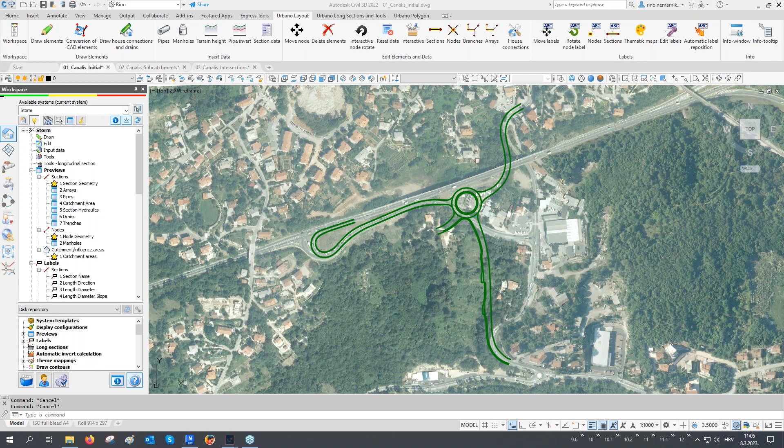As you can see here in this drawing, I have just this raster image of this area and these road edges that I received from a road designer. Here you can also see the existing standard T intersection that will be replaced with this new roundabout on a slightly different location. What else do I have in this drawing? I will show you.

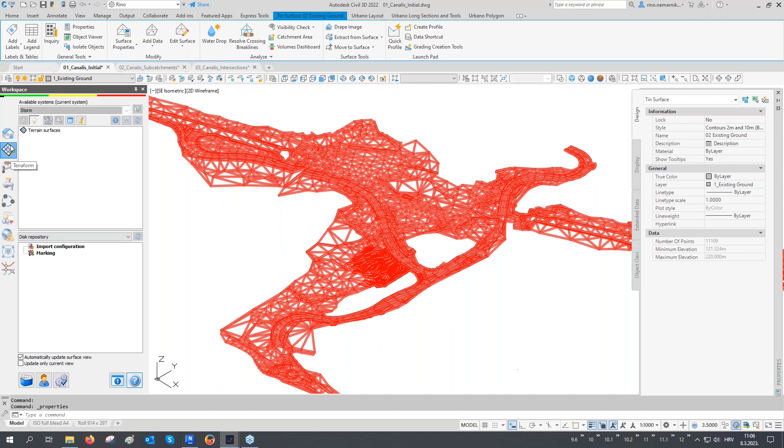I have 2 DTM surfaces. This is the existing ground surface. If we take a look at it in 3D, we can see this is a Civil 3D DTM surface. It's important to say that if you run Urbano on top of Civil 3D, you can use Civil 3D DTM surfaces directly. But if you run Urbano on plain AutoCAD, you can also use our own DTM modeler, which is called Terraform. So this is the existing ground.

And also I will show you the finished ground, which is this road surface that I received from the road designer. This will be our reference surface to design our storm network.

Okay, let's go back to plan view. And again, let's switch to a different layer state where I have some helping layers, some helping points, that I will connect by drawing the network interactively. Also I have some AutoCAD polylines that I will use to convert to an Urbano storm network.

So the first way how you can draw the network in Urbano is by drawing interactively in plan. Here in this dialog, you can see that you can set up many different options and parameters. For example, you can automatically set terrain elevations from a selected DTM surface, automatically set invert elevations to be on a constant depth below terrain, and also set pipe group and pipe diameter from the pipe catalog.

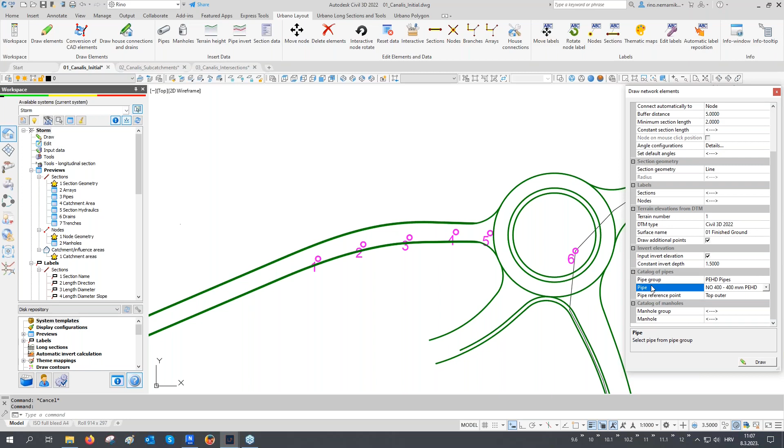So let's click draw. Now I will turn on AutoCAD OSNAP to just snap to the centers of these circles. Notice how, as I am clicking, the elevations are being automatically read from the selected DTM surface.

Okay, so we draw one part of the network interactively, and let's now convert these AutoCAD polylines. Let's open the second function, conversion of CAD elements, where you can set up all the same options as in the previous dialog, and also use this really nice function for layer filtering. Just select some element in plan, the software recognizes which layer this is, and now we can freely select the entire drawing, and the software will select just those elements on the selected layer. So now when we click convert, everything will be converted from plain AutoCAD polylines to Urbano Storm network.

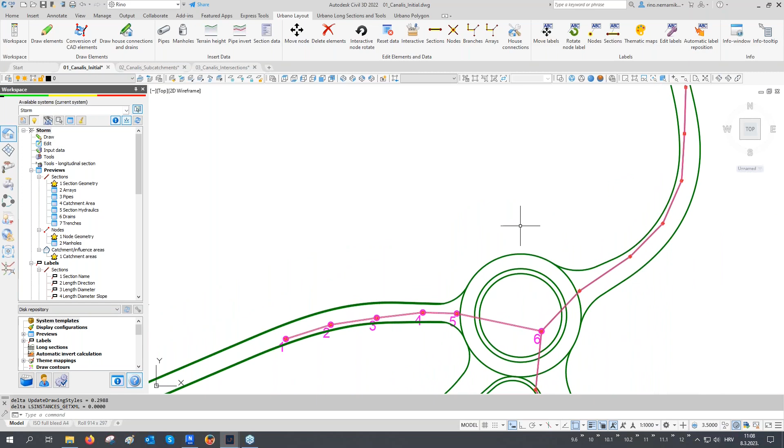Okay, so now that we've drawn our network, let's also label it. I will use default labels for nodes and also for sections. Notice, because these fonts are quite big, we had a lot of overlapping labels. But this can also be resolved really easily by interactively moving some labels one by one, or we can start this really nice function for automatic label reposition, where you can define some parameters for moving. When we click apply, all these labels that are overlapping will be moved, so there is no more overlapping between these labels in the entire drawing.

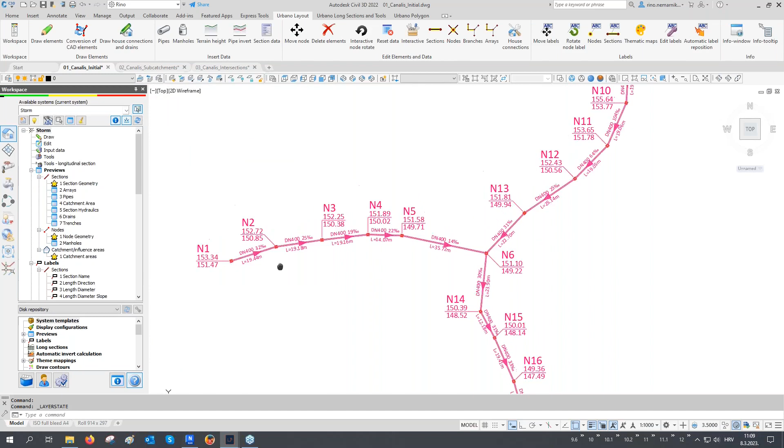Okay, let's now turn off these helping layers and let's focus just on the Urbano network. The best way to analyze an Urbano network is always by using Urbano data tables. Here in the workspace, you can see that each function in Urbano can have multiple configurations, which are basically sets of predefined data, settings, options, and so on for each function. So, for example, let's open these data tables. Here you can see that you can switch between these data configurations, and of course you can edit them and create your own.

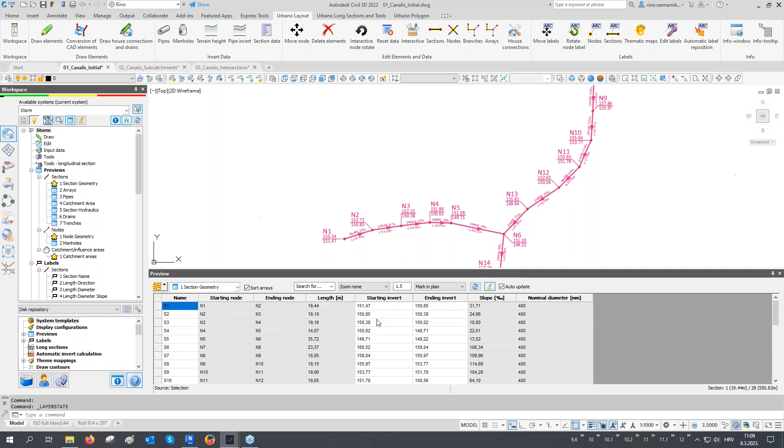If I select some configuration, you can see that you can preview all the data for all the elements for the entire network, or you can use these selection options to select just some parts of the network. For example, if we go to selection of sections, I can select, for example, these 3 sections, and I will get their data in the data table.

But also in Urbano, we have more intelligent selection options, for example selection of branches. Now you will see what a branch is in Urbano. A branch is basically everything in between 2 main nodes, so between starting, ending, and branching nodes. So if I select this branch, I will get all the sections that belong to that branch.

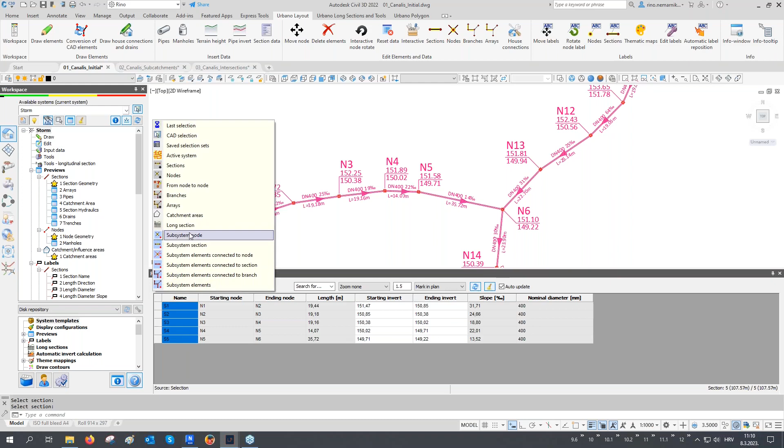Also, we have something that we call arrays. These arrays are basically arbitrary topology groups that the user can create by himself. You can edit them, split them, merge them, and by default one array is one part of the network that you draw at once interactively, or one original polyline if we converted it from CAD elements. So now if I select this array, I will get all the sections that belong to it. But also, we can switch to a different data table configuration for arrays, and now if I select the entire network, I can see the total group data for all the arrays. So we see A1, A2, and this little one is A3.

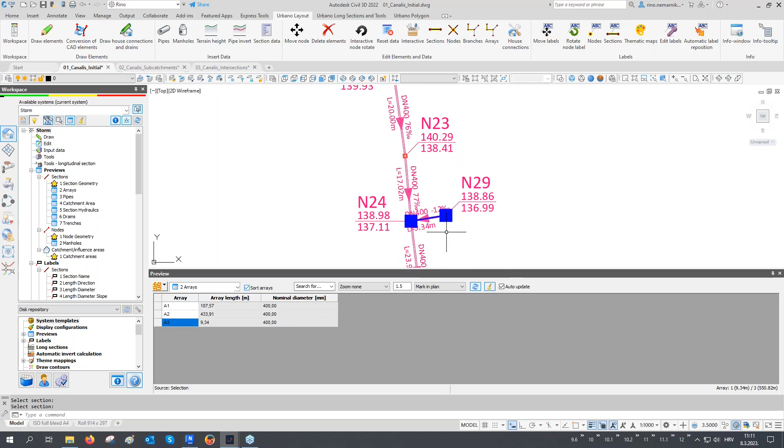Okay, let's rename these arrays now. In Urbano, there are multiple ways how you can rename all the network elements. The easiest way is always by using the data table, so all the white cells in the data table can be edited directly by double clicking in the cell. But I would like to show you one new function from Urbano 11 for automatic renaming of the arrays.

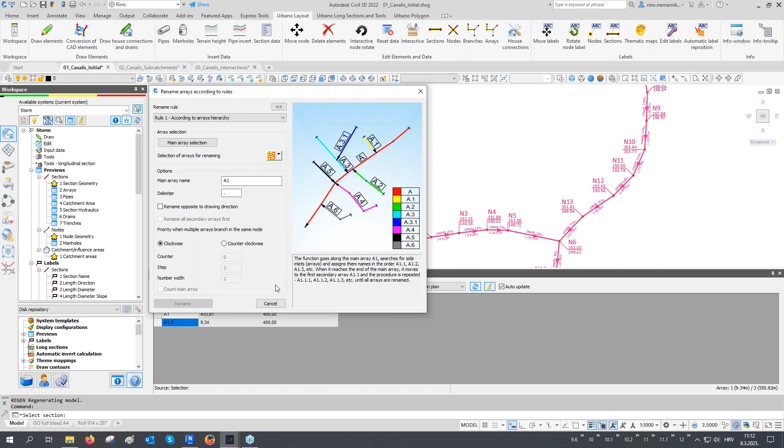So let's go to Edit, Rename Arrays according to rules. Here you can choose between 3 different rules, and I will select the first one, according to arrays hierarchy. So you have to select what will be the main array, then select arrays to be renamed, give a main array name, and set some delimiter. Now when we click rename, all the arrays will be renamed according to that rule. So now if we sort the data table, we see we have the main array A1, we have A1.1, and this little one will be A1.2.

Okay, so now that we renamed the arrays, let's also check the data for the nodes. Let's switch to a node geometry data table where we can see all the data about the nodes. Again, there are multiple ways how you can rename your nodes, but I like to use this automatic option, rename by distance, where you can select the entire network and then give a prefix or suffix.

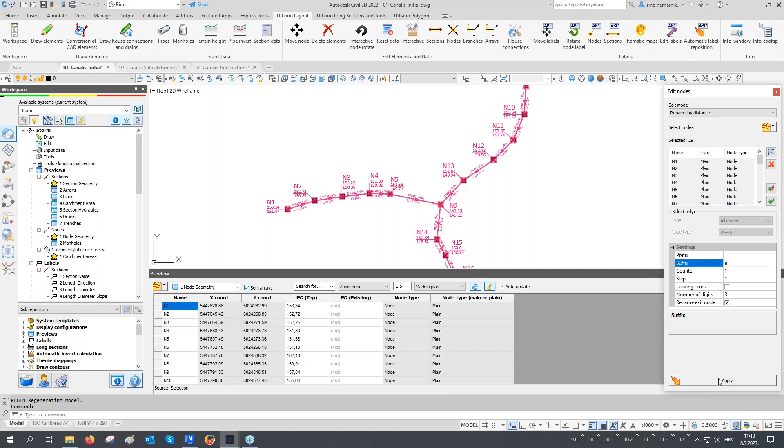In this case, I will set a suffix A. And when we click apply, all the nodes in the entire network will be renamed according to that rule.

So the software is searching for the node that is furthest away from the outfall, and it gives that node the smallest node name. Then it goes up to the branching of the network, and again searches for the node that is furthest away. If we go to the last node of the system, we see that node has the biggest name. Okay, so let's now also rename the sections.

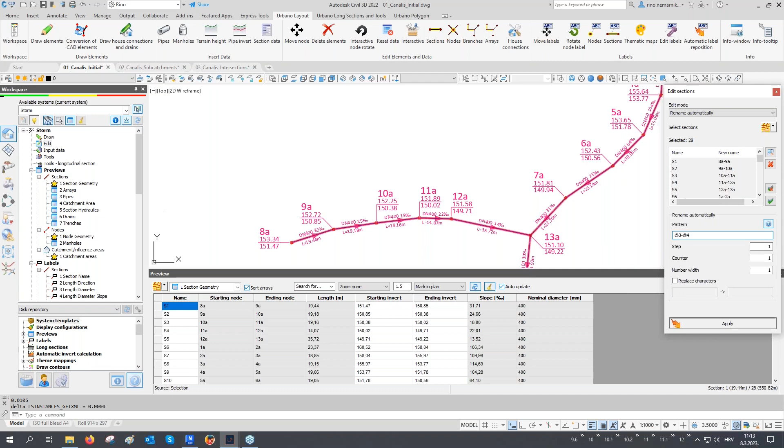Let's switch to section geometry. Like I said, there are multiple ways how you can rename them using multiple different rules. For the sections, I like to use this option to rename them automatically using the pattern from starting node name to ending node name. So now when I click apply, all my sections will be renamed so that the name of the section is from starting to ending node name.

Okay, so now that we know everything there is to know about Urbano topology and selection options, let's also draw profiles. To draw profiles in Urbano is extremely easy. Basically, all you have to do is select a profile configuration, and everything is stored inside, from the scale to the data to language, basically everything.

So I will select the entire network and we will draw these profiles according to arrays, and let's place them all in one row. When we click draw, we just have to define the insertion point and the profiles will be drawn.

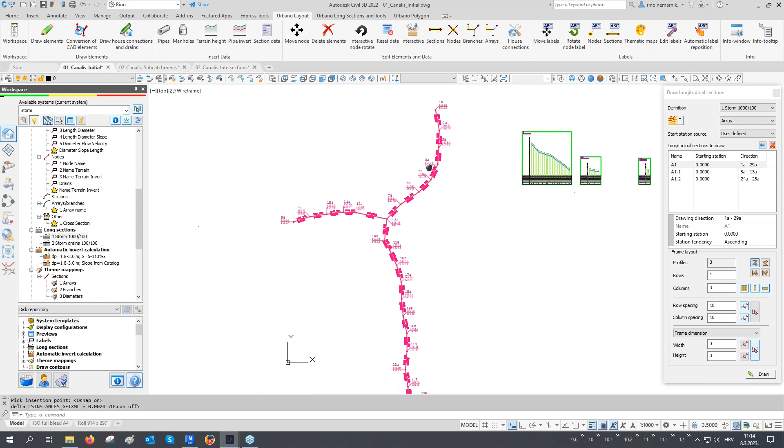Another great way how you can draw your profiles is by using this selection option from node to node, where you can go basically from any node to any node in any direction. For example, let's end up here in the last node of the system, and let's place this profile here. Let's do another one - let's go from this node all up to the last node, and place this profile here.

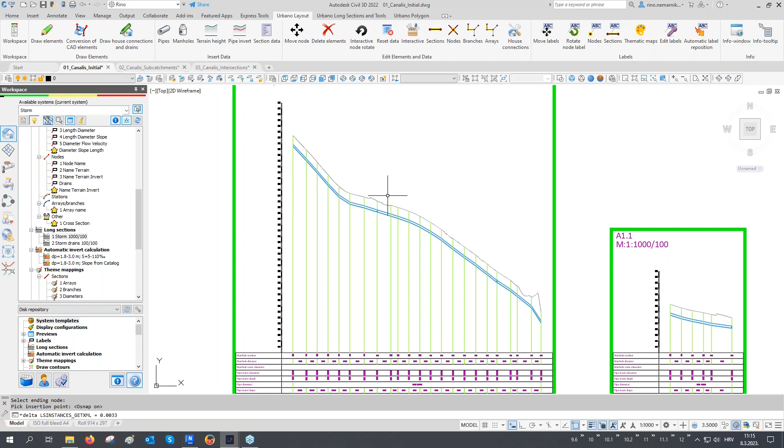Okay, so now that we drew the profiles, let's also check them. We can see that we have just one terrain line - this is the gray line of the finished ground surface that we defined automatically while drawing. But if we want to show more terrain lines in profiles, we can do that as well.

So let's go to the function for setting terrain elevations from digital terrain model. Let's select entire drawing, and from Civil 3D DTM surface, we will set the existing ground into terrain number 2. Here you can see that in Urbano, you can set up to 10 different terrain levels. Okay, let's save. And now you will see an additional terrain line appear in profiles.

So this green line is showing us the existing terrain. Now, if we select this terrain polyline, you see that we have a lot of these vertices, or as we call them in Urbano, additional points. These are basically places in plan where our sections are crossing the triangles of the DTM. Because this DTM is very dense, we have a lot of these unnecessary additional points.

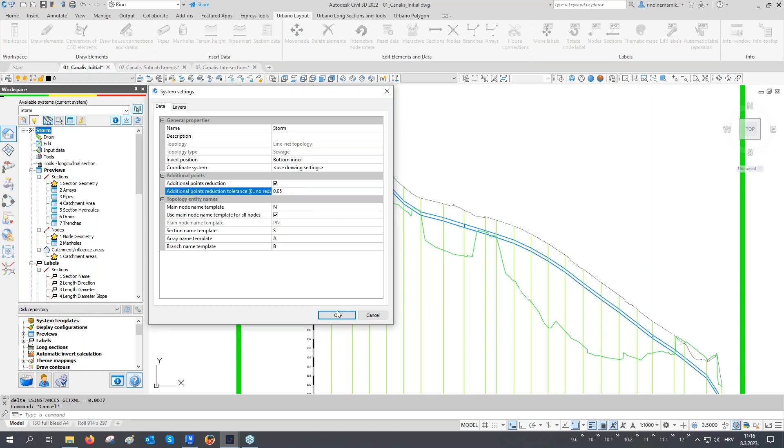Because of that, in version 11, we added a new function. Under the system settings, you can turn on additional point reduction and also define reduction tolerance. For example, let's set this tolerance to 5 centimeters and click OK - notice how the profile will automatically update. Now you can see that we significantly reduced the number of those unnecessary points.

But for example, if we take a look here, we see that maybe we went a little bit too far. So let's go back to this function and decrease this tolerance to 1 centimeter. 1 centimeter is a pretty small tolerance, and you can see that now this is more smooth, but still we significantly reduced the number of these additional points.

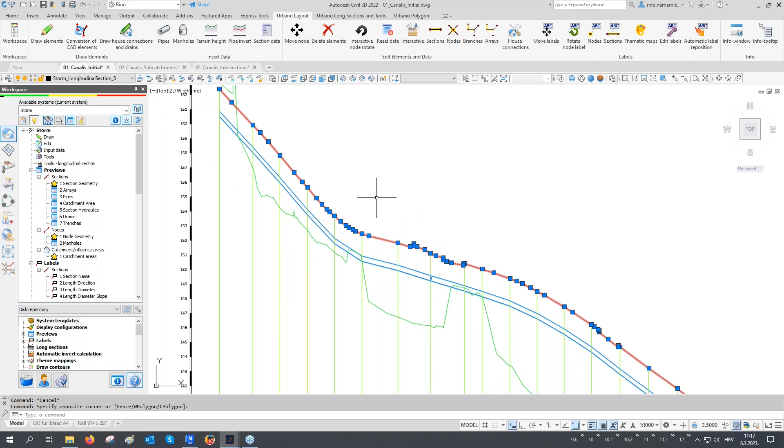Okay, let's now also set the manholes. Let's go to the function for setting of the manholes, and from the manhole catalog you can choose between many different manhole types, shapes, sizes, materials, and so on. I will select this PEHD manhole of 1000 millimeters diameter, select the entire network, and just click save. We will see that the manholes and manhole labels automatically appear in the profiles, and in these labels we can see the manhole name, terrain elevations, and also invert elevations.

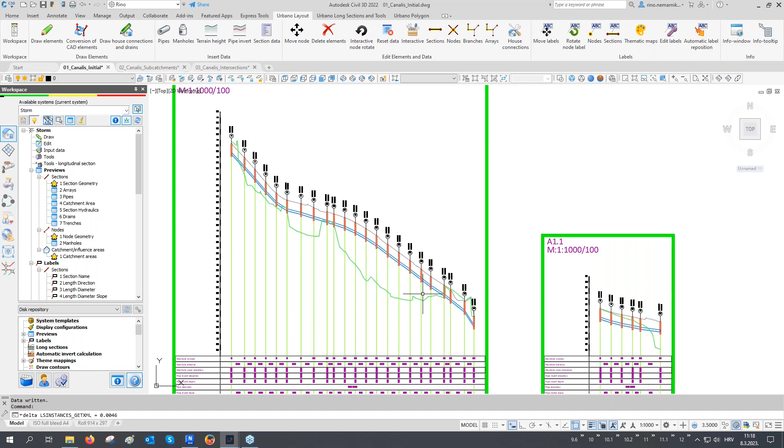Okay, if you remember, while drawing I placed my pipes to be on a constant depth below terrain, which ended up being a pretty nice solution for these first two profiles. But if we take a look at the third profile, we see that we have a negative slope here.

In Urbano, there are many different ways how you can define your pipe invert elevations automatically or interactively. First function I'd like to show you is this automatic invert calculation according to rules, where you can define minimum and maximum depth below terrain, minimum and maximum slope, and also some drop manhole parameters.

So let's select the entire network. Let's calculate, let's apply the changes, and let's save this configuration. Now you can see that we have a new solution of the pipe invert positions.

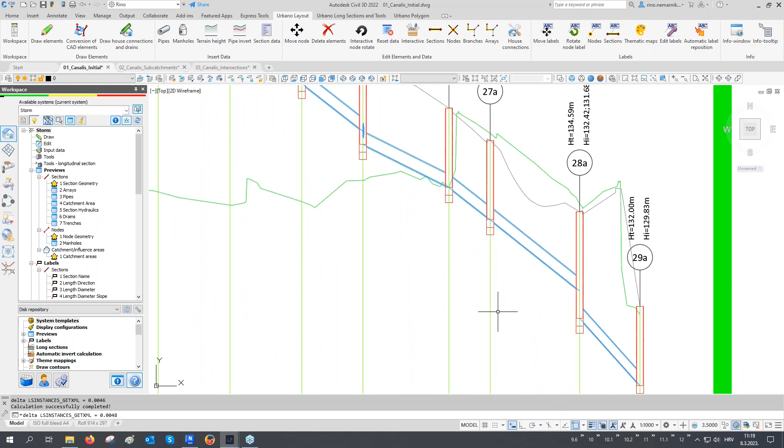So the software did some modifications. We can see that it inserted drop manholes in some places, and also the pipes are a little bit deeper. If you are not 100% satisfied with this solution offered by the software, of course you can continue editing these pipe invert positions by interactively drawing or editing pipe invert directly in the profiles.

I like to use this option, input and edit pipe invert, where you can basically straighten or even draw your pipe invert by line or by slope. And when I say pipe invert, it doesn't have to be just the invert - you can select what is the reference point on the pipe. It can be, for example, top of the pipe, bottom of the pipe, axis, or invert. We will go with the top of the pipe.

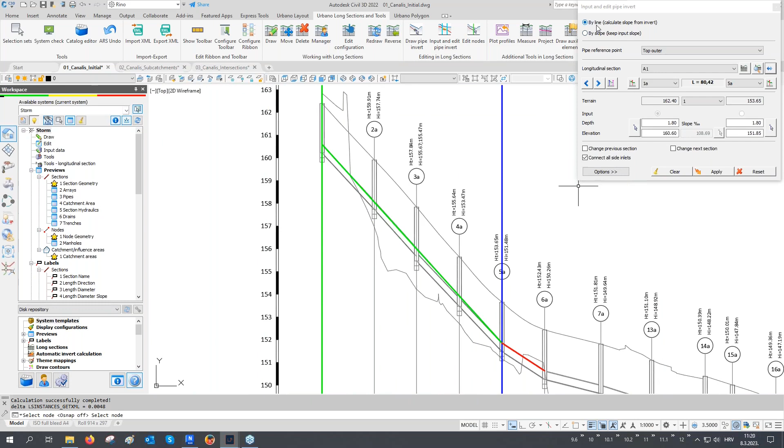So now, let's select some part of the profile, going from node 1 to node 5. First, I will use this option to straighten the pipe by line, and here you can define starting and ending depth or elevation. For example, let's increase the starting depth to 1.85 and end with 1.65. Like this, you can see by this temporary graphic how this solution will look. When you click apply, the pipe invert is changed.

Okay, let's now select the next part of the profile, let's say from node 5 to 18. Now let's switch to a different option, by slope, where you can define starting depth or elevation and a slope. For example, let's increase the starting depth - I'll go with 2.35, so we will have a bigger drop manhole here.

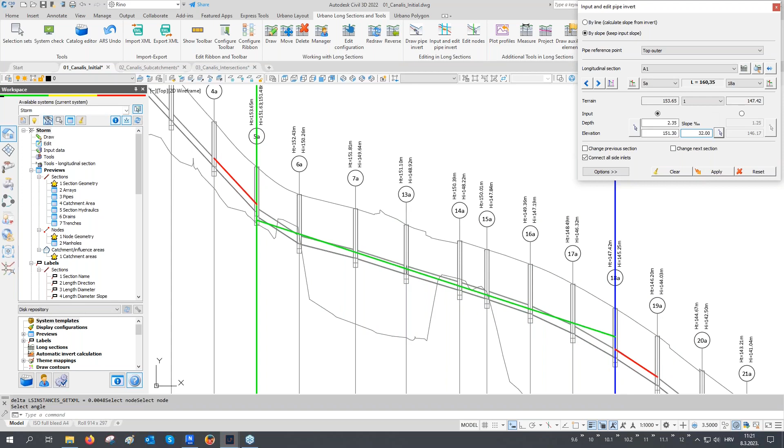Now you can define a constant slope by numerically defining it or by selecting it graphically from the drawing. For example, let's go like this - I will round it to 32. Okay, let's click apply. So this is how you can precisely define your pipe invert elevations for all of your profiles.

Okay, let's now switch to the following topic, which is definition of the catchment areas. I will again switch to a different layer state where I have these AutoCAD closed polylines forming these catchment areas that you can see here. Now we will use these CAD polylines and convert them to Urbano catchment areas.

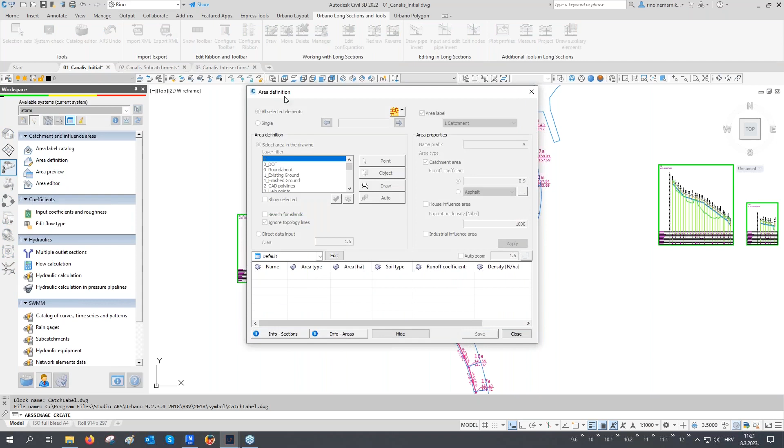So to do that, let's go to the Canalis panel and open the function for catchment area definition. In Urbano, you can define catchment areas so that one catchment area is defined for one section, or that one catchment area is defined for more sections - for example, for a branch, for an array, or for an arbitrary selection from node to node.

In this example, we will set one catchment area per section. So let's select this first section of the network. Now there are many different ways how you can define catchment areas. You can select an object, basically a closed polyline, you can draw the catchment area interactively, or you can select a point inside of a closed polygon.

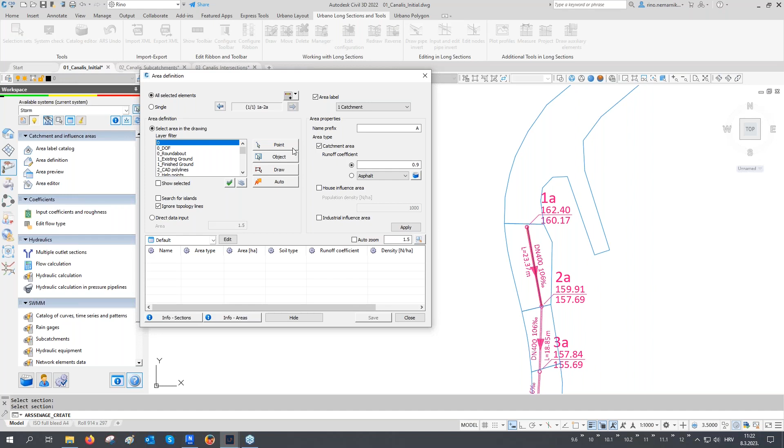First, I will use this option to select a closed polyline. Let's select this polyline here, and you see the software recognizes this as a catchment area. Now we can define a runoff coefficient - numerically, or by selecting it from this catalog of soil types. So let's set it up to be asphalt with a runoff coefficient of 0.9. Let's click OK, apply it, and save it.

So one catchment area is defined. Let's do one more - let's go to the second section of this network, and now I would like to use this pick point option. Here again you can use layer filtering, so just select the element from the plan, and the software recognizes which layer this is.

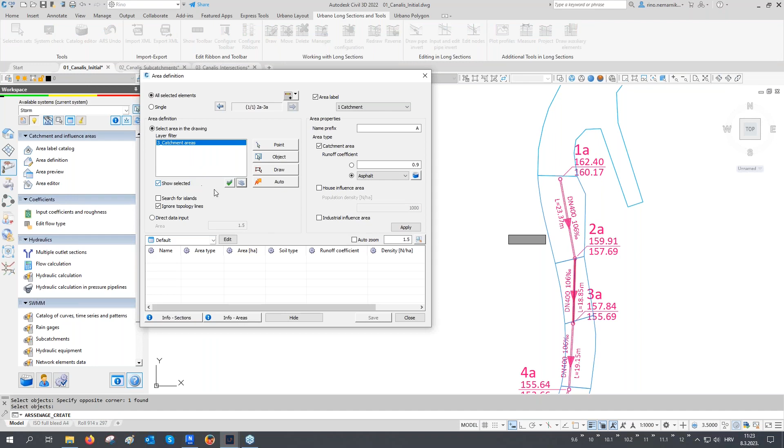Now we can go to pick point, and if a closed polygon is found, this will be a catchment area. Again, I will go with asphalt. Just click save. Let's do one more.

Now I will do this for this section here, using the pick point selection to select the center of this roundabout, but I will switch from asphalt to grass. Let's click apply. Now you see we have a soil type grass with the runoff coefficient of 0.30. Let's save this catchment area as well.

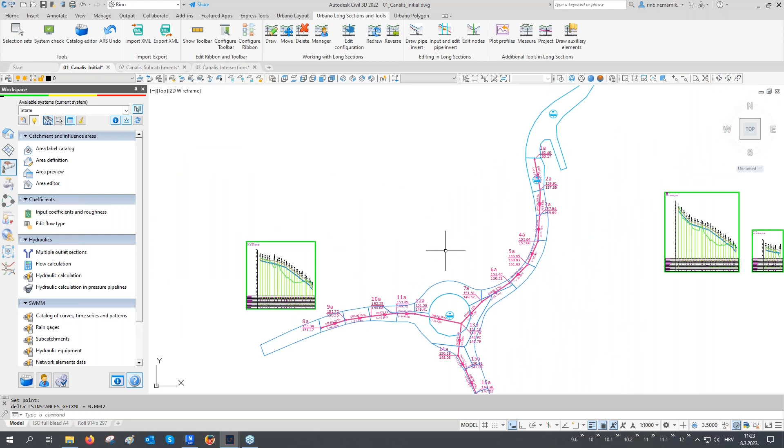So now we could continue defining these catchment areas for each section, but I would like to switch to a different drawing, which is basically this same project, but I have this stuff already done. If we take a look at this profile, you can see that I precisely defined my pipe invert elevations for every profile. And here in the last node, I deleted a manhole because here we will later have a free outfall. Also, you can see that I defined all these catchment areas, which can be seen from these catchment area labels.

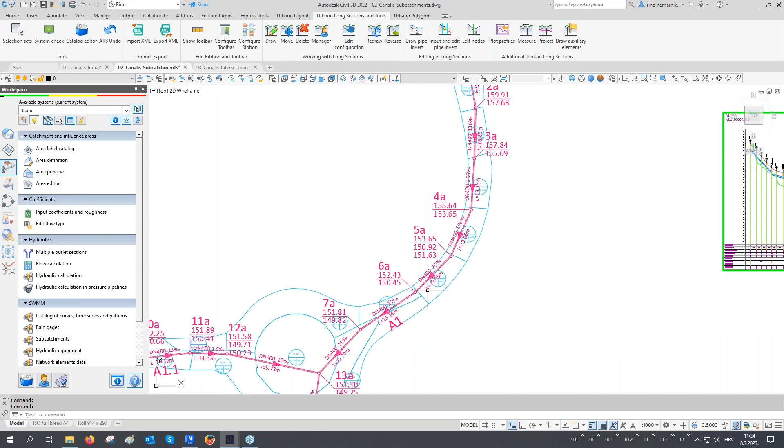If we want to see the data about the catchment areas, we can also open the data table. We can switch to catchment area preview, and here we can check all the data for the catchment areas.

Now that we have catchment areas defined, let's also calculate flows. Let's go to the flow calculation function. Here you can see that in Urbano Canalis, we offer many methods for flow calculation for both storm and sanitary flows. Because we support many different countries and standards, there are a lot of different methods which you can use.

But if you don't want to see all these methods, in version 11 we added a new function called selection of calculation methods. For example, if you don't use sanitary flow calculation methods, you can easily turn them off like this. When you click OK, you will see a lot fewer methods available here in the list.

For this project, we will use the rainflow simple calculation, which is basically a rational method, CIA method, with constant rainfall intensity. So I created two flow configurations here: one for 2 years return period with this constant rainfall intensity, and one for 5 years return period with a little bigger rainfall intensity.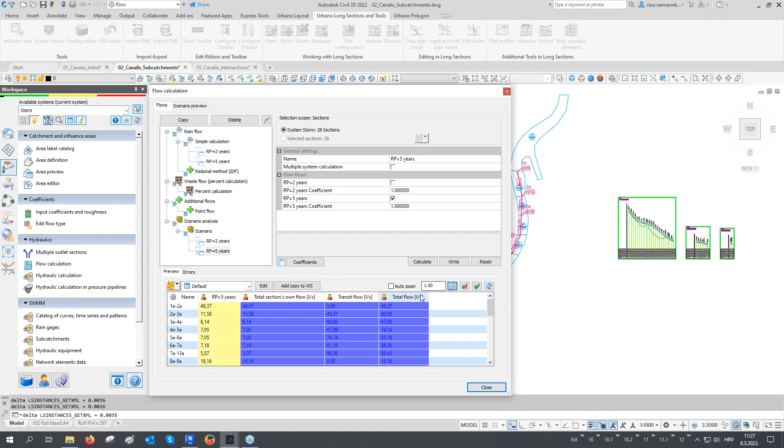Now, if you want, you can go to scenario preview and perform parallel hydraulic calculation or parallel pipe sizing for multiple different scenarios. It doesn't have to be 2, you can have any amount of scenarios.

But before we do that, I will go to hydraulic calculation options, and here we can set up some options. For example, the calculation type can be calculation according to existing diameters, or we can go with pipe sizing. If we go with pipe sizing, we have to define a pipe group from the pipe catalog, and we can also set up some calculation parameters, for example maximum fulfillment of the pipes and minimum pipe diameter.

So let's click OK, and let's turn on these scenarios. Now you can see in different colors, we can compare and calculate these values for 2 different flows, resulting in 2 different sets of diameters. In this first part of the network, there is no difference between these 2 scenarios. But here in the last part of the network, because of the higher flows, we also have bigger pipe diameters, and we see other results.

We see the water levels in the pipes, fulfillment percentages in the pipes, and also velocities. But this is just a scenario preview.

So if you want to actually calculate and save some values for these scenarios, we have to go to hydraulic calculation, select the scenario according to which we would like to size these pipes. Let's select 5 years return period. All the options are the same as before.

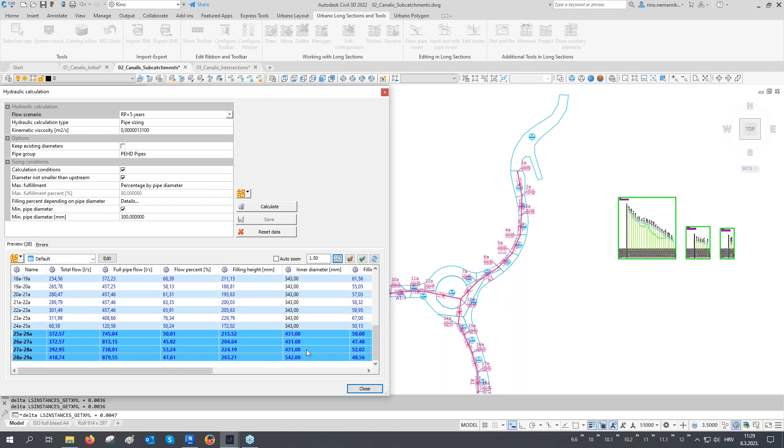Let's click calculate and let's click save. Now you see that the inner diameters didn't change from what we defined in the previous drawing, except for this last 4 sections, where now the software increased the pipe diameters. Let's close this and let's go to our plan.

We can see that everything in Urbano is completely automatic and dynamic. You see how the plan labels and the plan styles automatically updated, showing us now these bigger pipe diameters. Also, if we go to our profiles, we can see that the profile table also automatically updated, and also the pipes automatically updated, showing us now the water levels in the pipes.

We can see that we don't have the water levels in the manholes, and we can see that the water levels in the pipes are linear, and that's because this calculation that I just did uses steady state calculation according to Darcy-Weisbach and Colebrook-White equations.

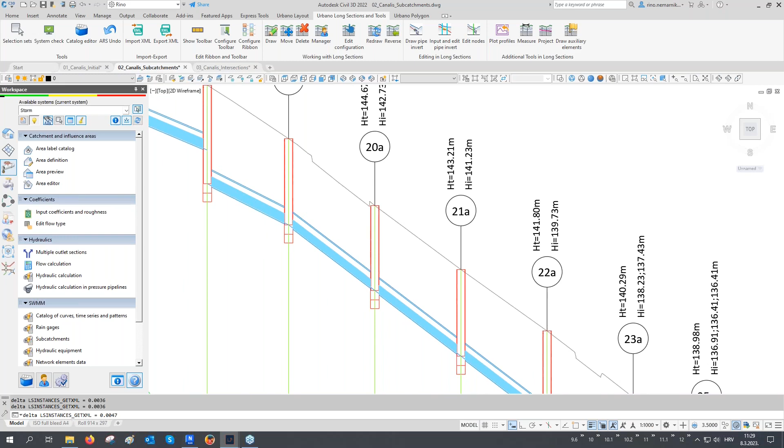Okay, let's now do the same calculation, but now using the EPA SWMM calculation engine. So from version 11, Urbano Canalis version 11, we integrated EPA SWMM 5.1 calculation into Canalis.

So before we go to calculation, let's go to hydraulic equipment. Now I will show you what equipment is available. Let's select some sections. For example, let's go to the last section of this system. So we can set up for the section to be a plain section, pump, orifice, weir, or outlet.

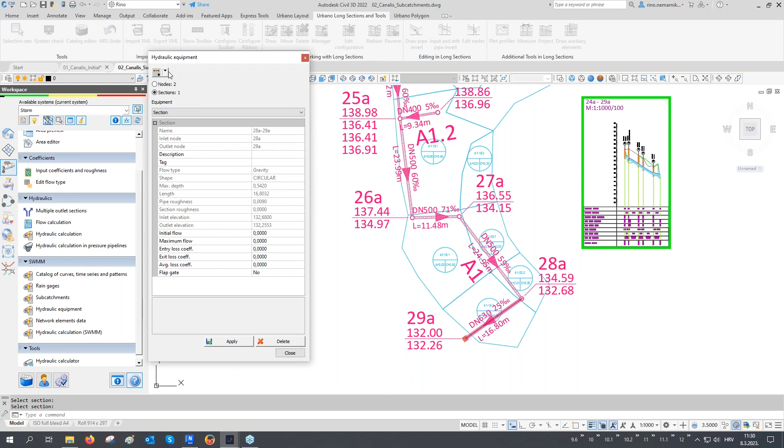And also for the nodes, let's select this last node. We can set it up to be a plain node or junction, outfall, divider, and storage unit, with all the parameters available in SWMM. We will set this last node to be outfall, type will be free, and we will leave all the other options as default.

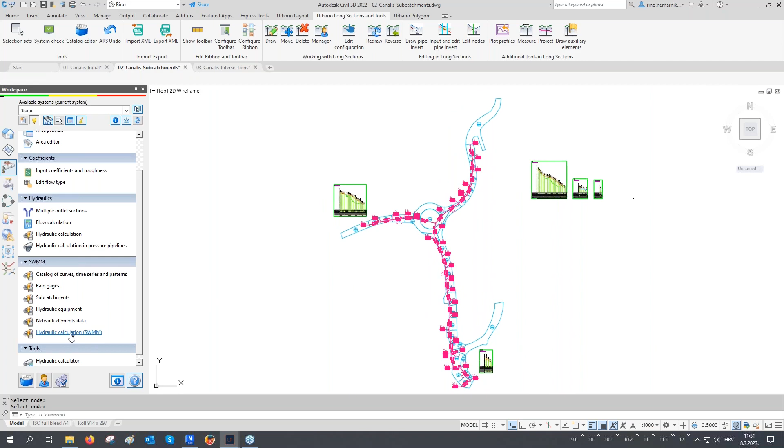Let's click apply. So now that we defined the outfall, let's run hydraulic calculation according to EPA SWMM. Let's go to this dialog. And before we run the calculation, let's go and check the options.

So now for the routing model, you can see that we can run steady flow calculation, kinematic wave, and dynamic wave. We will go with dynamic wave.

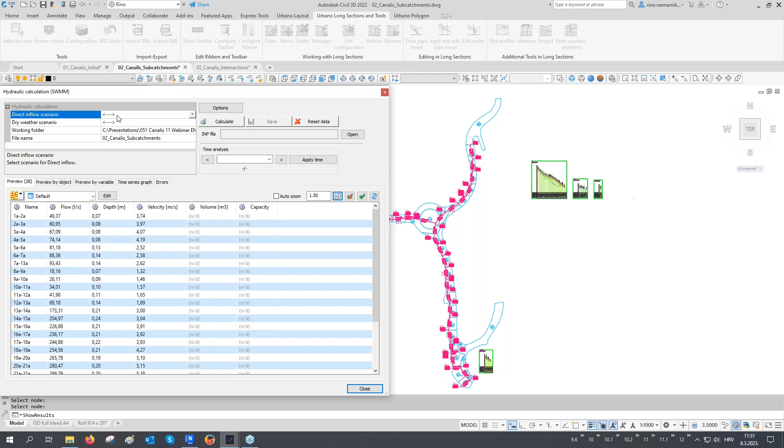And for this first calculation, I will turn off SWMM calculating rainfall and runoff, because I would like to use the flows that we already calculated with Canalis. Let's click OK. And here under direct inflow scenario, I will just select these flows calculated with Canalis, this 5 years return period, and let's click calculate.

Now you will see the flows didn't change because we just told SWMM to calculate with the flows that we already have, but we see the depths and the velocities are a little bit different. This is logical because SWMM uses Manning equation, and now we are using dynamic wave equation.

Also, we see that we have some data that we didn't have before, so we see the water volumes in the pipes and also pipe capacities.

Let's save these results and let's switch to a default preview for the nodes, where now we can see that we have water depths and head elevations for the manholes and also some other data for nodes as well.

Let's close this dialog and let's zoom to profiles. Now you can see that we also have the water levels showing for the manholes, and we can see that the water levels in the pipes are not linear anymore. They are not constant in each pipe because now we have a dynamic wave calculation.

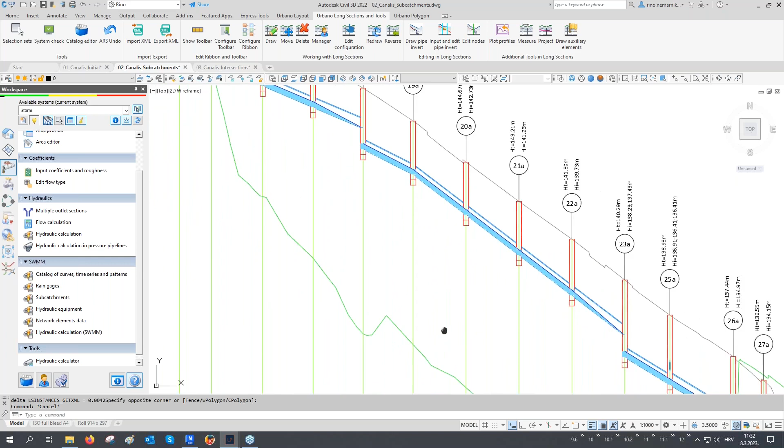Okay, so this is calculation according to flows calculated with Urbano Canalis. Let's now do a calculation where we will leave EPA SWMM to calculate everything, including the flows.

So to do that, we have to define a rain gauge. Let's go to the function for adding a rain gauge. For the rain format, I will set intensity. Time interval, we will set 5 minutes.

And for the data source, it will be a time series that I previously created for this project. So I have rainfall intensities for 5 years return period. Let's click OK. Let's now go to the subcatchments dialog, where you can define all the SWMM available parameters for each catchment area or subcatchment.

Here you can see that you can precisely define all these parameters for each subcatchment, or you can select multiple subcatchments or all of them and define the same values for all the catchment areas in the selection. So I will set the same rain gauge to all the catchment areas.

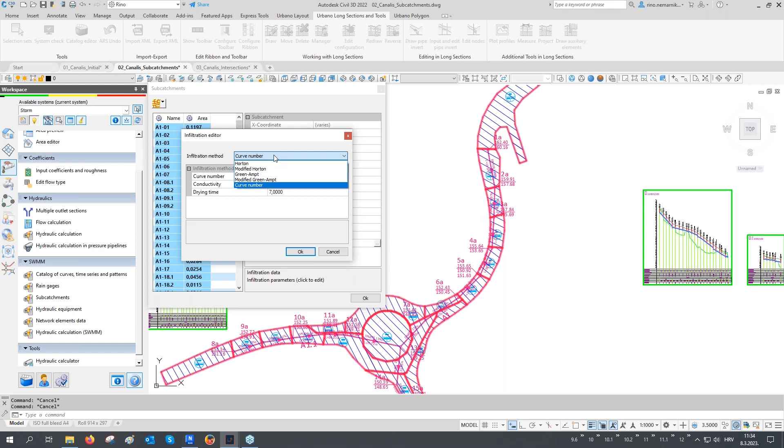Here you can also see that you can define infiltration data. For the infiltration method, you can choose between 5 different methods, including Horton, Green-Ampt, and curve number, which we will use here. Let's click OK, and let's click OK one more time.

Let's now go to hydraulic calculation according to SWMM. Now we will turn off this direct inflow scenario, and let's go to options. Now I will turn on this option to calculate rainfall and runoff. We will do a 2 hour simulation with the reporting step each 5 minutes and the runoff step each 1 minute. Let's click OK, run the calculation, and save the results.

Now we can see that we have 24 sets of results for each 5 minutes of the simulation. Now we can go through time and apply those results. So we are now 10 minutes into the simulation, which is our peak flow.

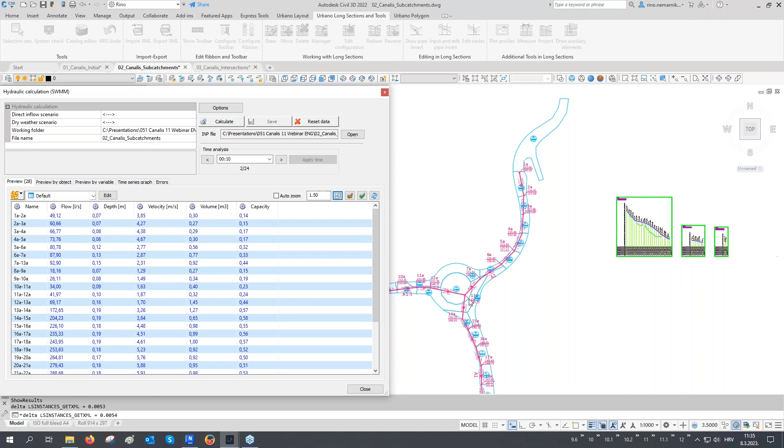You can check all the results in the data table. You can even label your sections and nodes in plan with these values. You can also check the results in the profiles. Let's zoom to this profile, and now we can go through time like this and apply the results for that time period.

We can also go to a default preview for the nodes to check the results for the nodes. And now we can also go to a preview for the catchment areas, where we can see that EPA-SWMM calculated also the precipitation, infiltration, and runoff data.

Let's go back to the default preview for the sections. This is a standard preview where you can see all the data for all the elements in selection for one time period. You can go through time and apply the times to see the values, but also we can go to preview by object, where you can select an object. It can be a section, a node, or a catchment area.

For example, let's select this last section of the system. Now for one element, we can check all the data for all the times during the time simulation. Or we can go to preview by variable, where we can define which variable we would like to check.

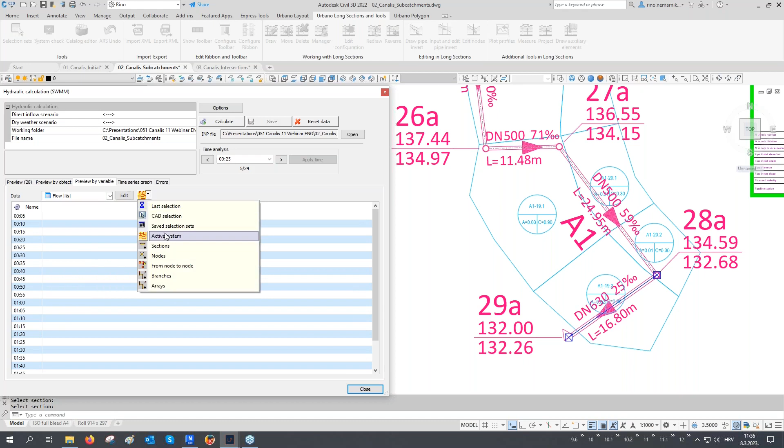For example, let's go with flows for the sections. Now I can select multiple sections—let's select this one, this one, this one, and the last one. Now you can check these values, compare them, and analyze them for multiple elements at once.

But the best way to analyze these time-dependent results is always by drawing some graphs. So let's draw these time series graphs. You can select up to three data sets, choosing between data for sections, for nodes, and for catchment areas.

For data number 1, we will select section flow. For data number 2, we will select node depth, manhole depth. And for data number 3, we will select precipitation for the catchment areas. Now you can select one or more elements.

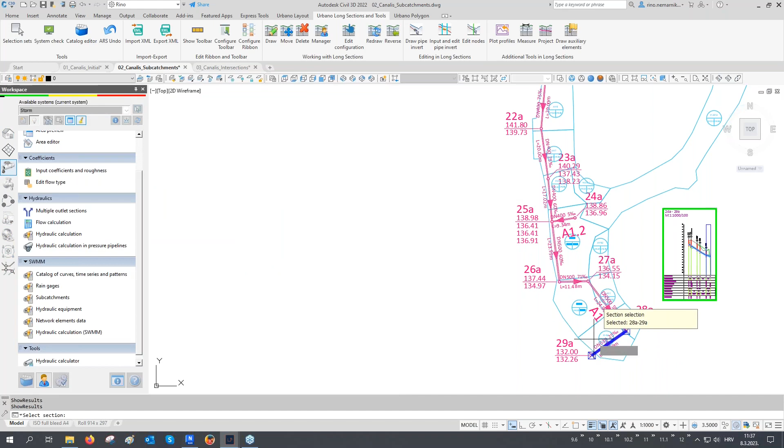Let's select this section, let's select this last node, the outfall, and let's select this last catchment area. Now we can compare and analyze these values, everything on the same graph. You can also add multiple elements and do all kinds of analysis, and you can also draw these graphs to CAD if you want to have them in CAD.

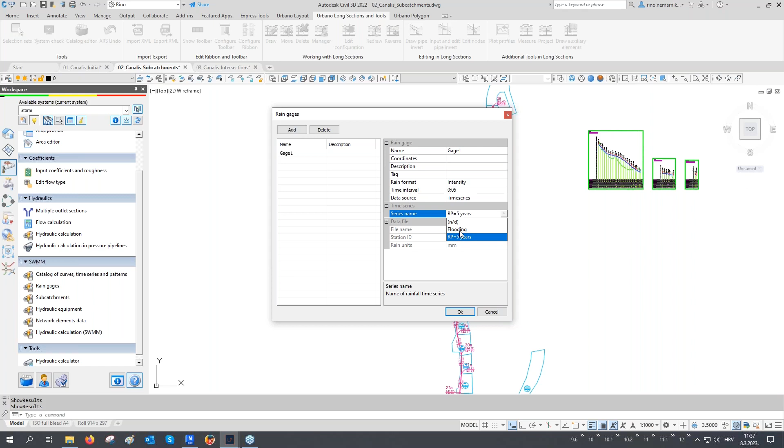Okay, and the last thing I would like to show you here, let's go to rain gauges. Let's now replace this 5 year return period time series with this time series that I created with very high rainfall intensities that will result in flooding. Let's click OK, and let's zoom to this profile.

Let's go to hydraulic calculation according to SWMM and just rerun this hydraulic calculation. Let's save the results and go through time. So 10 minutes into the simulation is our peak flow. Let's click apply.

Now you will see that because of the very high rainfall intensities that I defined, we have a lot of very high flows, which will result in some pipes being 100% full. And also if we go to the default preview for the nodes, we see that for some nodes, we also have overflow or flooding.

So these nodes 13 and 14, we see that we have flooding. But if we go through time, we will see that these water levels will start to drop. So at this point, we see that we have no more flooding. And like this, we can go through time. For example, I think 40 minutes into the simulation, the water will go back to our pipes.

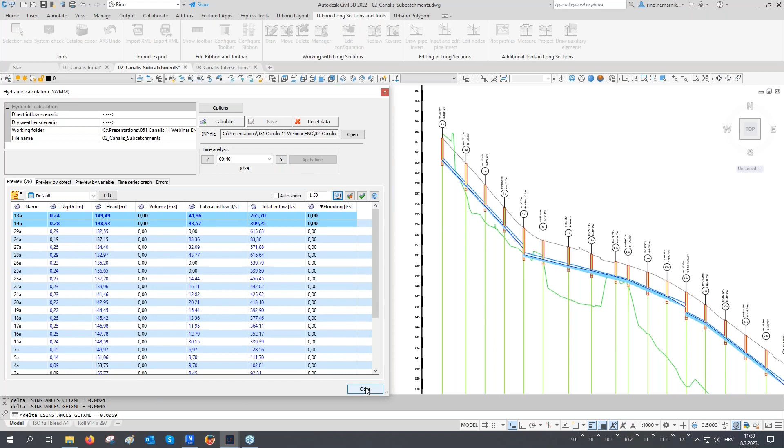Okay, so this is some very exciting new features in Urbano 11 Canalis regarding this EPA SWMM 5.1 integrated calculation. So we are now done with this hydraulic calculation, hydraulic modeling part of the presentation. And let's now switch to something different, which is more of a detailed design features.

And now I would like to draw the storm drains. You can draw storm drains by interactively drawing in plan, or again by converting AutoCAD elements. So here you can see that I have 29 plain AutoCAD lines that represent the positions of these storm drains.

Let's open the function for drawing of the storm drains, where you can automatically set the pipes for those drains. You can automatically define the terrain elevations from selected DTM surface. And we will go with the constant invert slope of these pipes of 20 per mille. Also we will define a starting depth in the drain node, invert depth of 1 meter. Also, you can define some name prefix for these drains, like this.

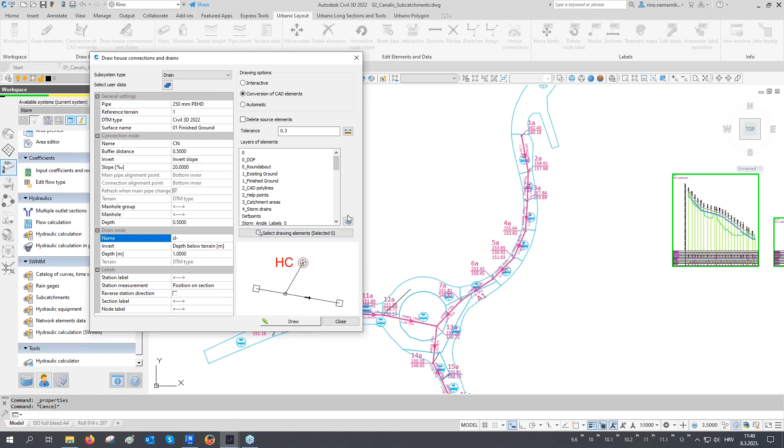Again, we can use this standard layer filtering option to select some element in plan, like this. And now we can select the whole drawing, and the software will filter out and select only those elements on selected layer. So now let's click draw, and everything will be converted from plain AutoCAD lines to this Urbano storm drains elements. Okay, so now that we draw these storm drains, let's also draw their profiles.

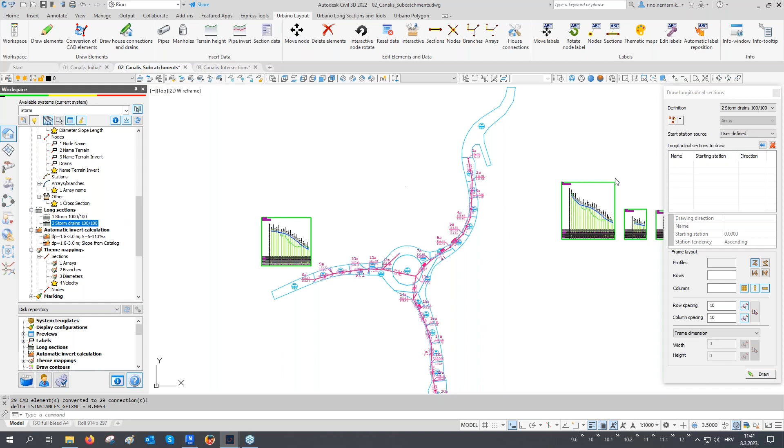So let's go back to home. Let's select a profile configuration. Now I will use this slightly different configuration in a larger scale, 100 to 100. Let's select all the subsystem elements, so all the storm drains, and let's draw their profiles. Again, you have to just select the insertion point and all the profiles will be drawn.

Okay, let's now take a look at them, and you can see how I defined the pipe slope is exactly 20 per mille, and we see that the invert depth in the starting node, in the drain node, is exactly 1 meter, and we defined those values for all the storm drains.

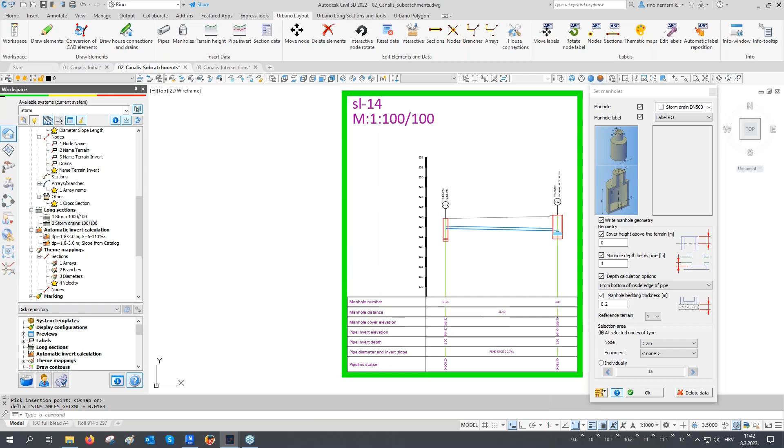Okay, let's now set the manholes. So let's go back to this function for setting of the manholes. And I will now use different manhole for the storm drains, smaller manholes. And I will define a manhole depth below the pipe for the sedimentation tank, 1 meter. And I will select all the nodes in the drawing, but I will use node type filter to select only the drain nodes. And let's now click OK. And you will see that each drain will now have a manhole like this, and we see that we defined that type of the manhole for all the storm drain nodes.

So now that all the manholes are set, let's also draw the manhole schemes. So this is another great function in Urbano, and like everything is stored in these configurations, from scale to data to colors, hatches, dimensions. So let's select this manhole scheme configuration. I will select all the manholes in the drawing, so 57 manholes, and let's just click draw.

Again, let's define the insertion point, and in a matter of seconds, these 57 manhole schemes are drawn. We can take a look at them, and like I said, all this data, this plan and profile views, dimensions, everything is defined in this configuration.

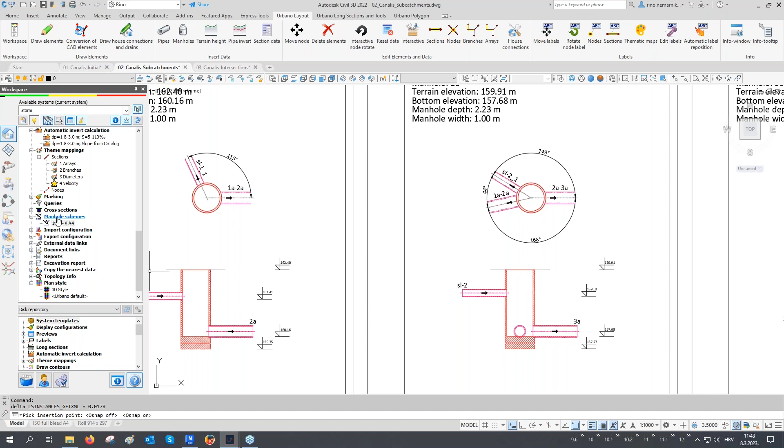Okay, so this is a little bit a bigger scale because I would like to plot these to A4 papers. And to plot these manhole schemes, in Urbano 11, we added a new function for plotting these kinds of drawings, for example, cross sections and manhole schemes. So let's go to tools, to this new function.

First of all, we have to define what we are plotting. So we will plot manhole schemes. And now we can select all manhole schemes or just some of them by using interactive or CAD selection. I will select this first row. And now we can define a paper. We can set up some standard paper parameters like orientation, margins, title block. We can draw one drawing per paper or multiple drawings per paper. We'll go with one drawing per paper.

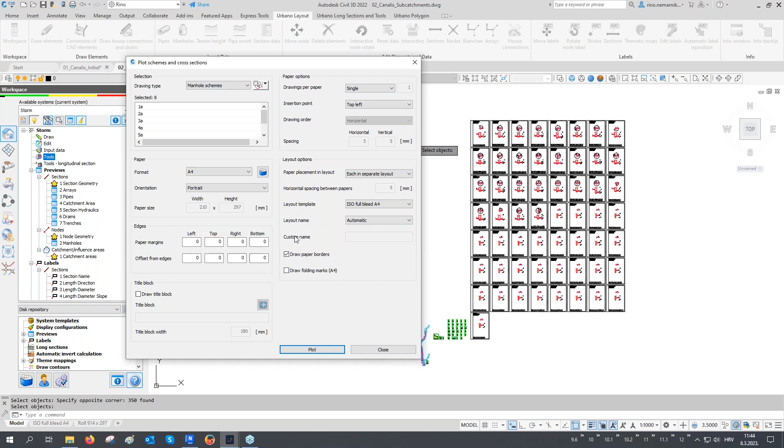We have to select the layout template, and when we click plot, all these selected manhole schemes will be plotted to layout. So we can take a look and we see that each layout is named according to the manhole scheme. These manhole schemes are ready to be plotted, for example, to PDFs.

Let's go back to model and now also plot the profiles. In Urbano 11, we have a new function for plotting profiles that is very easy to understand and use. First you have to select the profiles - you can select all of them or just some. I will select these three main profiles.

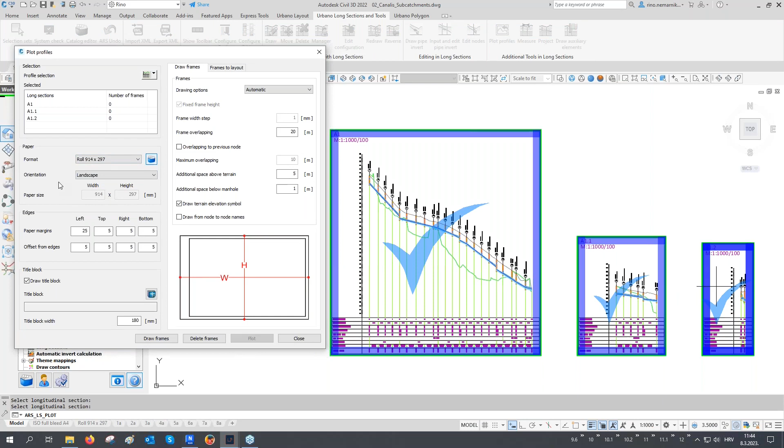Again, you have to select a paper format and you can define some standard paper parameters like orientation and margins. You can select the actual title block or just leave the empty space so you can insert your own title block later directly in the layouts.

First of all, we have to draw frames, so you can set up some parameters. When we click draw frames, you can see that these helping frames are drawn.

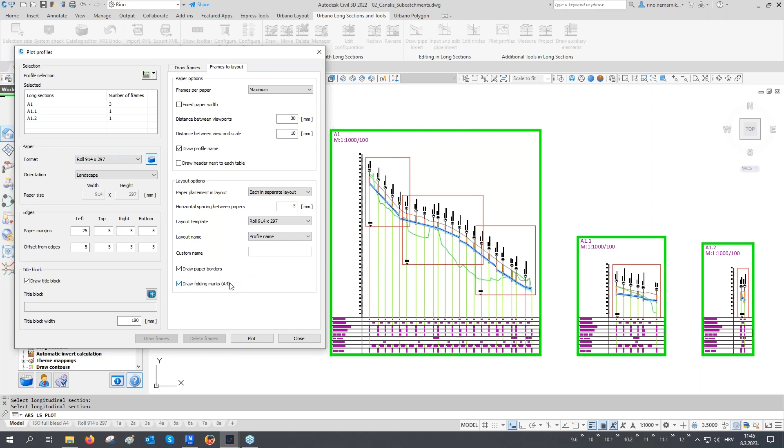Let's now go to the function drawing frames to layout, where again you can set up some parameters. You can define the layout template, and I will use this really nice option to draw folding marks so we can easily fold this paper roll that I'm using to standard A4 paper format. So let's now click plot and everything will be plotted to layout.

This is profile A1, as we see split into 3 views. We see these folding marks that I mentioned, so we can easily fold this paper to A4 format, and we see this empty space that we left for insertion of the title block. Let's also take a look at profile A1.1 and A1.2.

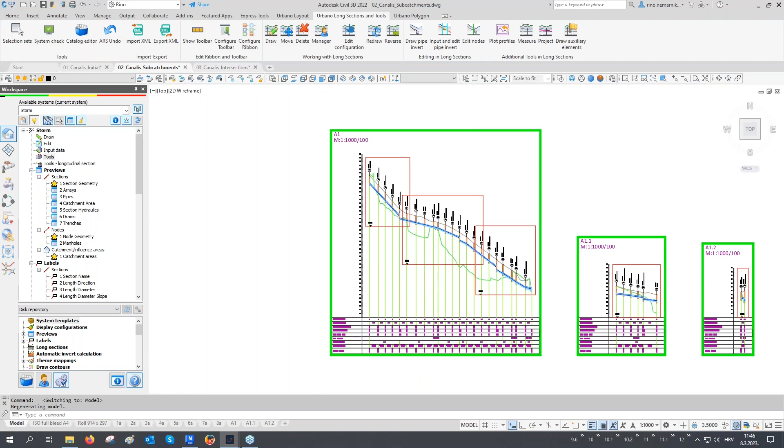At this point, let's go back to model. Now I would like to switch to a final example today, where I would like to show you intersections between multiple pipe infrastructure networks. When I say intersections, I mean crossings and clashes. Here you can see we don't have just one network anymore - we have more networks here: storm network, sanitary network, water network, culverts, and also open channels.

It's important to say that from Urbano 11, we added the possibility to design and run hydraulic calculations according to EPA SWMM for the open channels. Here you can see one mixed system, basically a combination of these open channels and culverts going through the body of this newly designed road.

Also important to say, whenever you draw something new, or if you import it from external file sources, all the crossings and clashes in Urbano are completely automatic. If we take a look at our profiles, we see that now we have the relative positions of all the other intersected pipe networks.

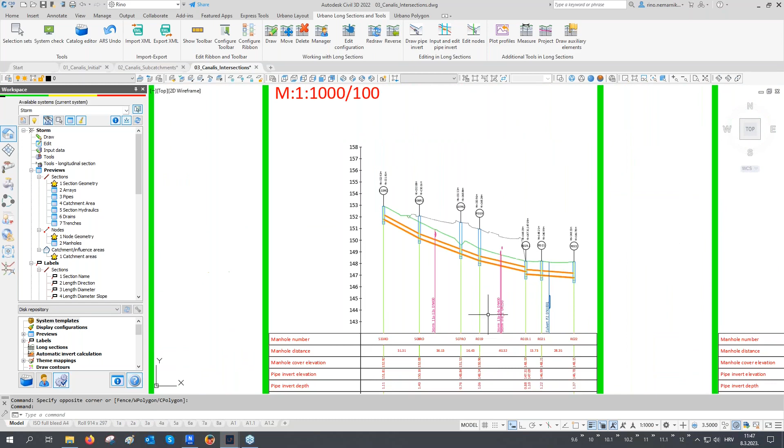For example, this is a profile of our sanitary network, and we can see the relative positions of the sanitary pipes and also the position of this culvert. Also, if we take a look at the storm profile, we see this water pipe here, and also we see this intersected open channel. So this is standard intersection analysis between multiple Urbano pipe networks.

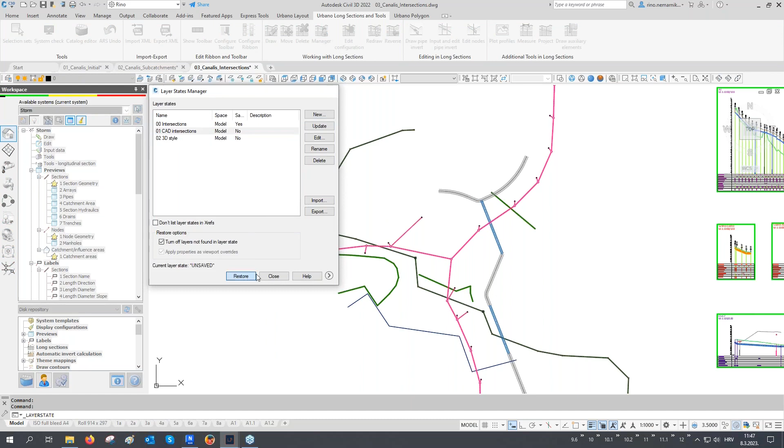But also in Urbano, we can analyze intersections between Urbano pipe networks and groups of CAD elements. These plain CAD elements can basically be lines, 2D or 3D polylines. Here we have some 2D polylines, which are basically Croatian Telecom cables. Now I will run an intersection analysis between Urbano elements and these plain CAD elements.

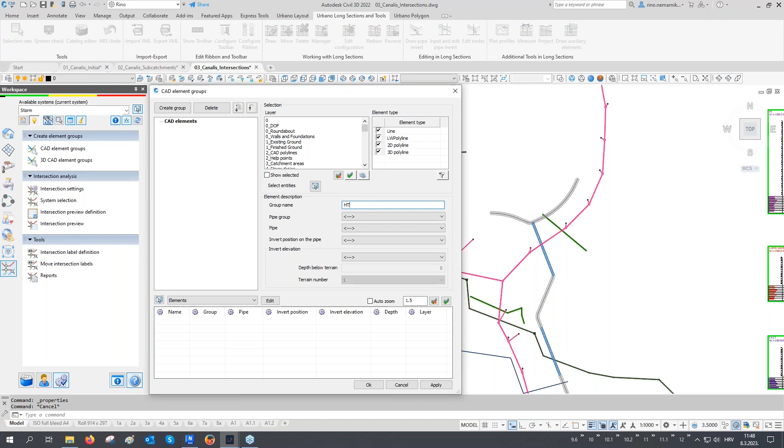To do that, we have to create so-called groups. Let's go to the intersection panel and the function CAD element groups. We have to create a group, so let's give it a name - I will call it HT, like Croatian Telecom. Then I will select a layer from the plan like this, and now I can freely select all the elements on that layer like this.

Now for that group, we can define the data - we can define the same data for the entire group, or individually for each polyline. Let's define the pipe group to be PVC pipes. The pipe will be, for example, 110 diameter, and we have to define the position below the ground.

So let's say that the top of the pipe is at a constant depth below terrain of 0.60 meters. This group is now defined and will be treated like any other Urbano pipe network.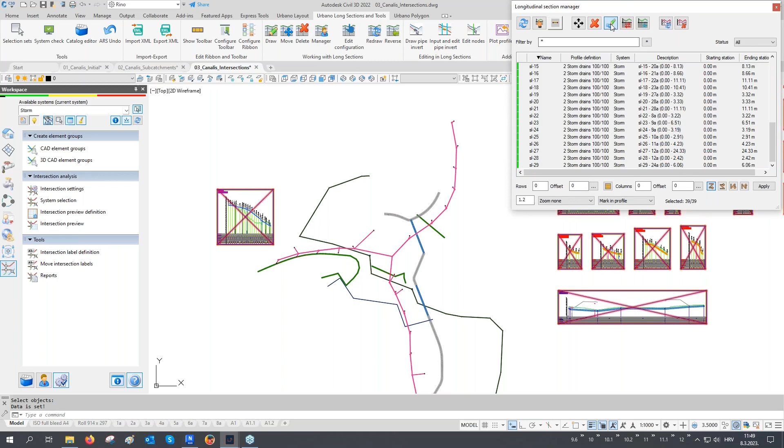Let's click OK. To show these intersections in profiles, all we have to do is go to Profile Manager, select all the profiles of all systems, and redraw or refresh them. In a matter of seconds, all of them will be refreshed.

Now we can also see the relative position of these Croatian Telecom cables in our profiles. These are the intersected pipes that we see here.

If we need to see this data about intersections in plan as well, in intersection settings we can turn on automatic labeling and define the label configuration we'd like to use. Let's click OK, and now we see these nice labels also appearing in plan.

For example, this is the 3D distance, the shortest distance between two intersected elements. We see the terrain elevations at the intersected point, and also the depths of both intersected pipes. If the labels overlap, we can easily move them with the new function in Urbano 11.

So just go to Move Labels and easily move these labels.

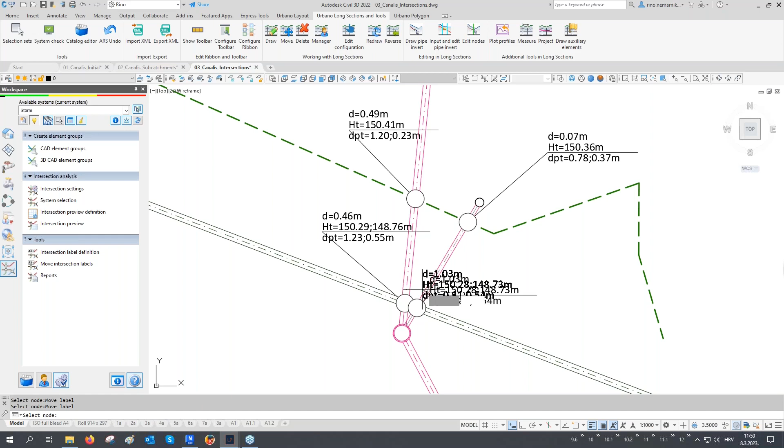If you need more information about these crossings and potential clashes, we can go to the intersection preview, where you can see all the data about these intersections. When you pick a row in the data table, it automatically zooms to those crossings in plan or in profile, and you can see all the data about these intersections.

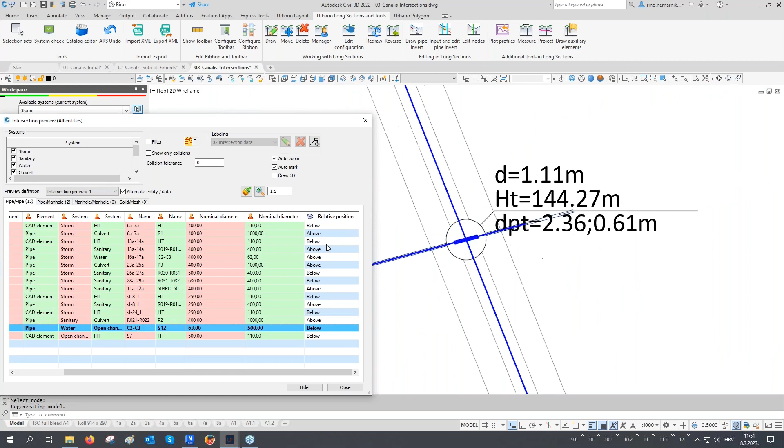For example, which systems and which pipes these are, what their nominal diameters are, and if we scroll to the last column, we see this important data showing which pipes are below or above the selected pipes. We can also sort this data table by distances.

So we see that in this example we don't have any physical clashes. We just have the crossings of the pipes in plan.

But if I go to the second tab here - this first one was pipes with pipes, but the second tab is pipes with manholes - we see that we have two clashes here. Let's select it, and we can see that these clashes are between these Croatian Telecom cables and this manhole of the storm drain. So we can easily resolve this.

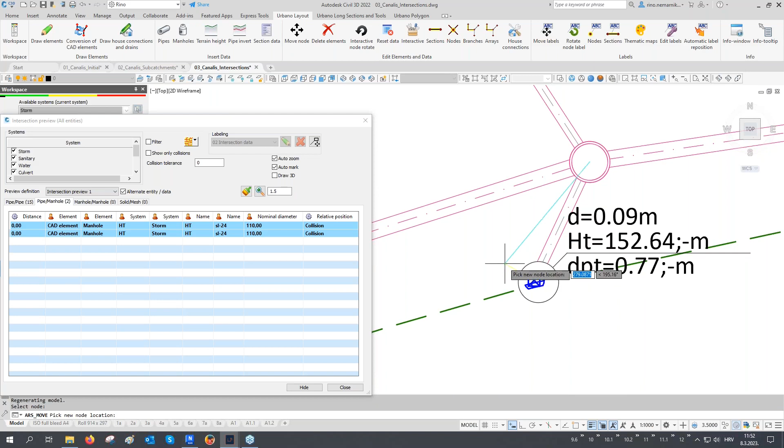Let's go to the function for moving a node, and I'll simply move this storm drain node here. Now you can see that the data table automatically refreshed, and we have no more clashes between pipes and manholes.

Now I'd like to show you what's new regarding intersection analysis in Urbano 11: the possibility to analyze intersections between Urbano pipe networks, including groups of CAD elements, with AutoCAD 3D Solid or 3D Mesh elements.

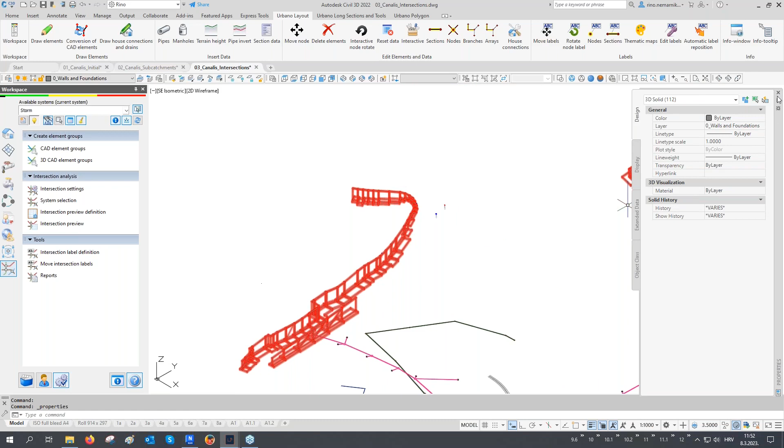Here you can see I have some 3D Solid elements for these retaining walls and foundations, and also some traffic signs here with their foundations also as 3D solid objects. So just like for the lines and polylines, we have to create a group.

Let's go to the second function here, which is very similar. So create a group, let's give it a name - let's say walls. Again we can use layer filtering to select everything on that layer from the drawing, and one group is created.

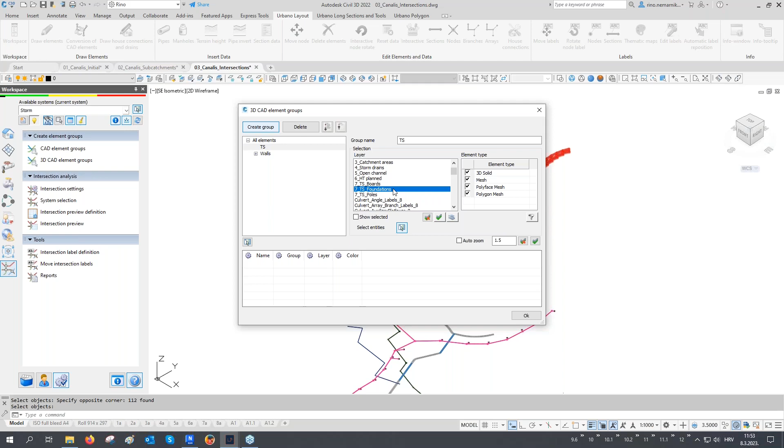Let's now create another group, and I'll call it TS, like traffic signs, and select the traffic sign foundations layer, because I'm interested only in what's happening below the ground - but if you want to analyze other intersections, you can select other elements as well. Let's select all the traffic sign foundations, and two groups are created.

Let's click OK, and let's now go to intersection preview. I'll turn on drawing of 3D, and let's go to this special new tab: intersection of everything else with 3D Solid and 3D Mesh elements.

Here you can see the software basically works the same - it calculates the overlappings, the crossings in plan, but that's not so important here. So let's turn on this filter to show only collisions, only clashes, and you can define the collision tolerance, basically a clearance - let's say 20 centimeters. But we see that we are good; everything is at a greater distance than 20 centimeters.

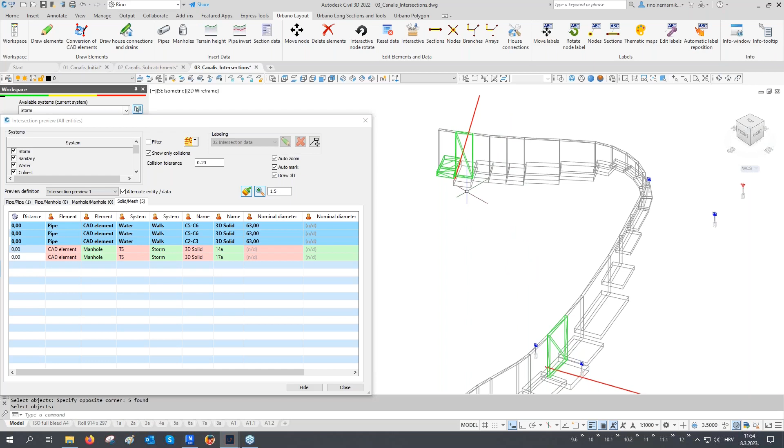So now when I pick inside of the table, I can see these clashes. Let's see more of them like this. These are basically clashes between Urbano water network, water pipes, and these retaining walls and their foundations. But this is done according to this real project, so it's not an issue here because we can just place those pipes inside of protection pipes, which can also be done in Urbano. But here we have two problems: this is a clash between Urbano manholes and these foundations of these traffic signs.

So let's now close this dialog, go back to plan view, and let's resolve this. Of course, we could easily move this Urbano manhole, but it's easier for me, and I believe for the traffic designer as well, to just move this solid like this. So whatever you move, the point is that everything is completely dynamic and automatic like this.

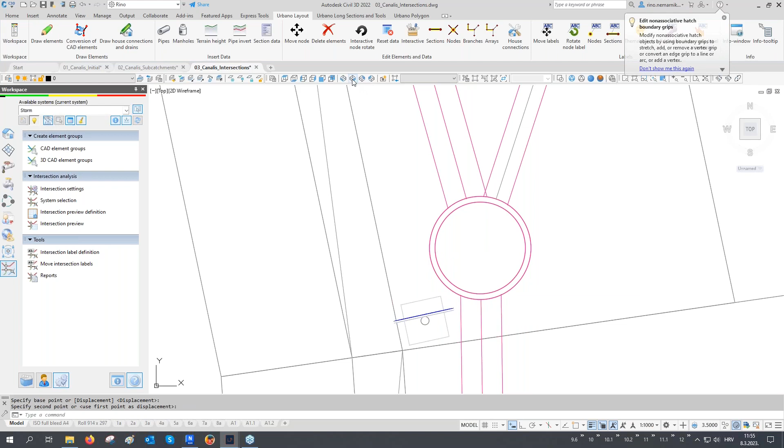And now let's go back to 3D. Let's go to intersection preview, and now you can see that the table automatically updated. So now only these three clashes remained that we said they are okay.

Okay, so now that we have a clash-free model, let's also create a 3D BIM model. To do that, first of all, let's show all these pipe infrastructure systems in 3D. I will use this multi-system input and apply 3D style to all these networks. So in Urbano, 2D or 3D is just a matter of style.

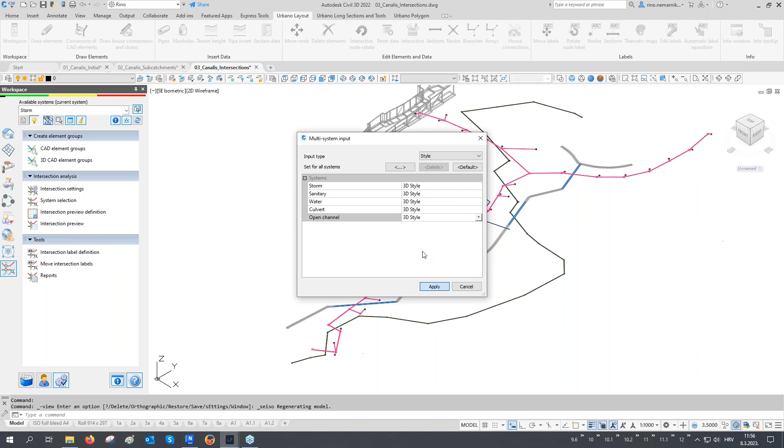So if you want to show your network in 2D using AutoCAD lines and blocks, you can. If you want to show your network in 3D using AutoCAD 3D solid objects, you can do that as well. So these are now AutoCAD 3D solid objects, but they are live model elements. So even if they are in 3D, if I change something, the 3D view will automatically update.

And here we can see our pipes, manholes, drains. We see the other pipe infrastructure systems. We see these open channels, culverts - everything is here.

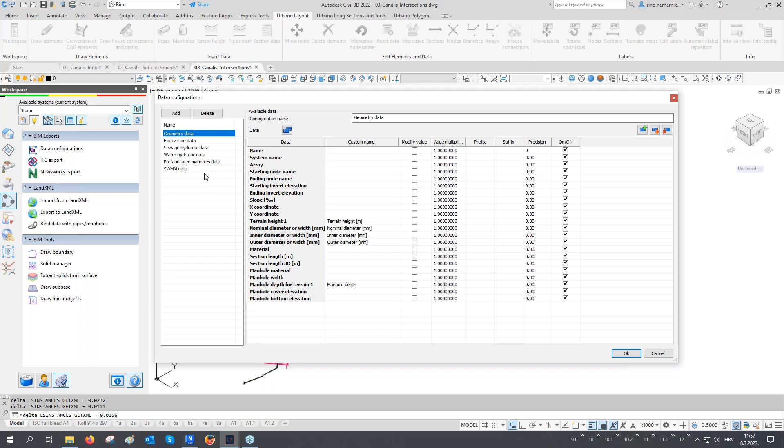Okay, so let's now export this to IFC. To do that, let's go to the Urbano BIM panel. And first of all, I would like to show you this data configurations function, where you can define the data groups to be exported with your 3D BIM model. So here I created some groups. You can create them once and then use them for all of your exports. For example, I created a geometry data group, some excavation data group, SWMM data group, and so on.

So let's now go to IFC export. Here you can define all the systems that you would like to export, all the DTM surfaces, and also for each network you can define which data groups you would like to export with the 3D elements. So for the storm network, we will have the geometry data group and the SWMM data group, and for all other networks we will have just the geometry data group.

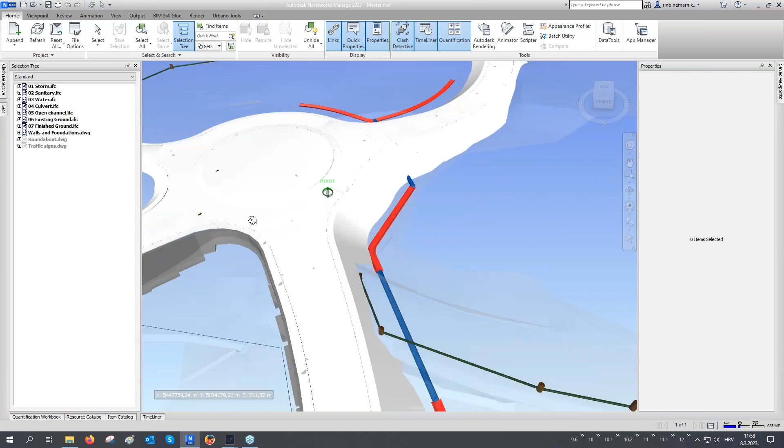So let's now export this to IFC, and in a matter of seconds this will be exported. Now we can open this IFC with any BIM viewer - I like to use Autodesk Navisworks. And here it is. This is the entire model that we exported from Urbano, with the addition of these retaining walls, that is basically a DWG file. And here we can see everything - we see the existing ground.

We see the finished ground, that now I will hide because I would like to see my pipes under the road. For example, let's select this storm pipe, and in the properties dialog we can see these data groups exported from Urbano. So this is the geometry data group. Also we see the SWMM data group, and also if we select a manhole we see this SWMM data. So even in our BIM model, we can see this hydraulic calculation, hydraulic modeling data calculated with Urbano Canalis and EPA SWMM.

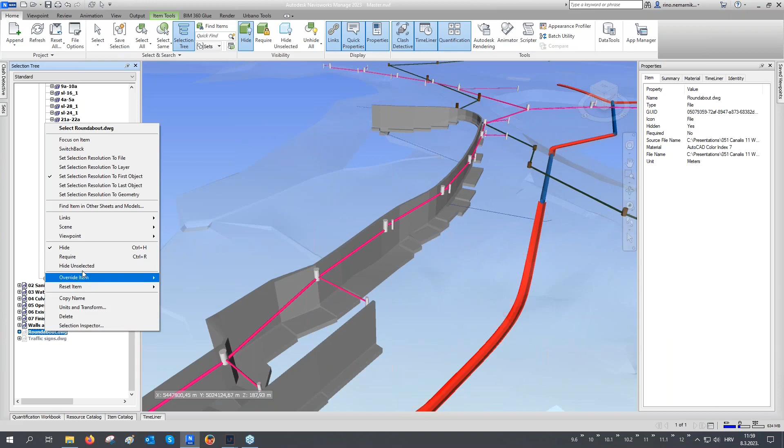And for the final thing today, I will also show you this road. So let's just select this roundabout, let's unhide it, and this is how our final aggregated model looks like. So we see this roundabout and these roads are created with Civil 3D. Also the terrain surfaces are created with Civil 3D, and all the pipe infrastructure networks, including this system of open channels, are created with Urbano.